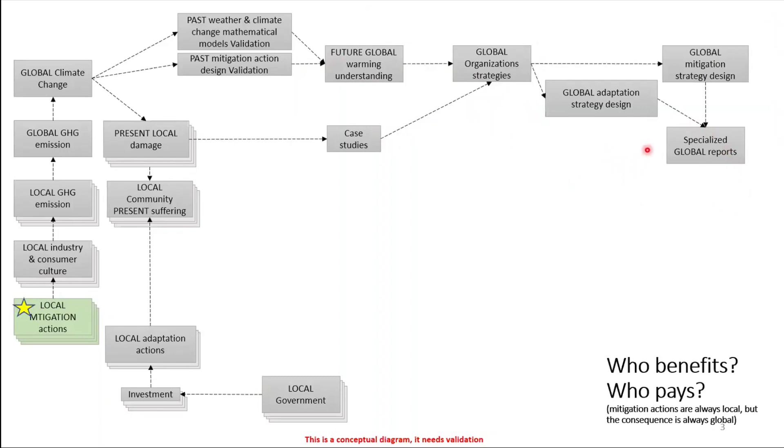And in parallel, global climate change enables the validation and verification of several mathematical models and also past mitigation actions. So this helps to understand global warming. That helps global organizations to design new strategies, and they also use new case studies from new damages produced in different parts of the world. And with all this, they generate specialized global reports combining adaptation strategies and mitigation strategies.

But we also have third-party climate change analysts and companies that generate their own technology reviews, for example. This is highlighted because we are going to talk about one of these reports about cooling, in this case, space cooling. These kinds of reports help to adapt global strategies to local strategies. And after this, local governments can understand, with some help, the recommendations for local action. They also receive some top-down pressure. And then we are closing this loop with some investment, and some local mitigation actions are done in several countries.

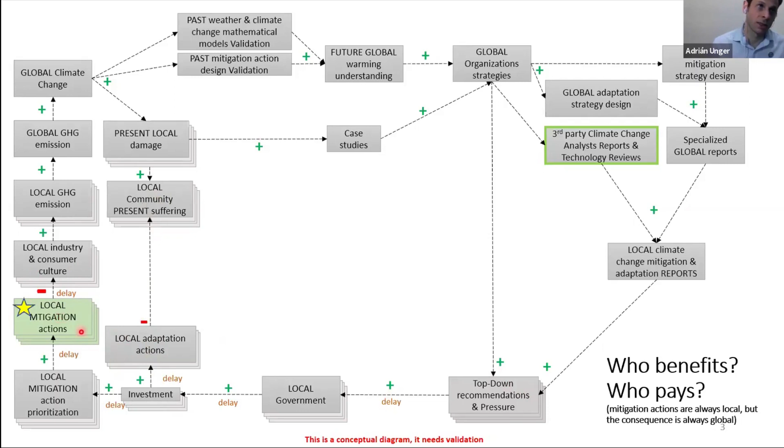After that, we can introduce delays almost everywhere, and understand the relationship between the blocks here. For example, if more local adaptation actions are taken, we will get less suffering of the people. And here we also have a negative relation, in which with more mitigation actions, less emissions. The local industry and consumer culture change for the better.

Yes, thank you. So we look at what the problem of cooling is. The presentation focuses on space cooling, but we can look at cooling in general to start with. Cooling is vital for both health and prosperity. However, the problem is that business as usual, the way we are cooling, will be a disaster for the planet. So we have this contradiction. Something that's good will also cause damage. So getting cooling right, without damaging the planet, is a problem, but it's also an opportunity. The next slide.

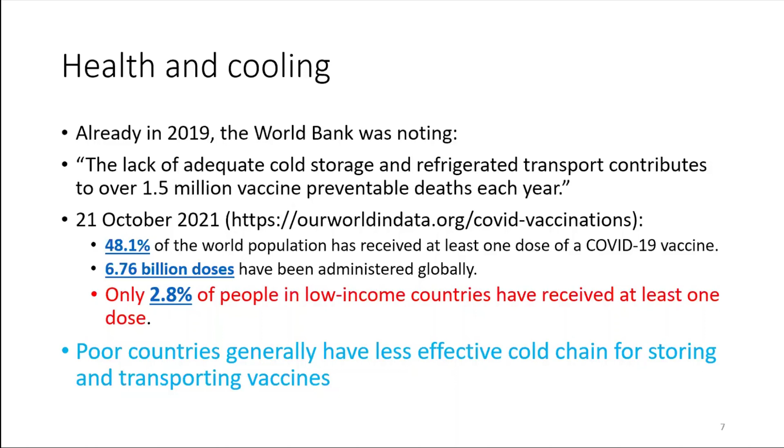And as of yesterday, about half of the world population has received at least one dose of COVID-19 vaccine, but only 2.8% of people in low-income countries have received one dose. So there's a big gap in access to vaccines, and a lot of it is related to access to cold, to have the vaccine sent to the people who need it, who might not have refrigerated locations and refrigerated transport. So cold and health is very important. Next slide.

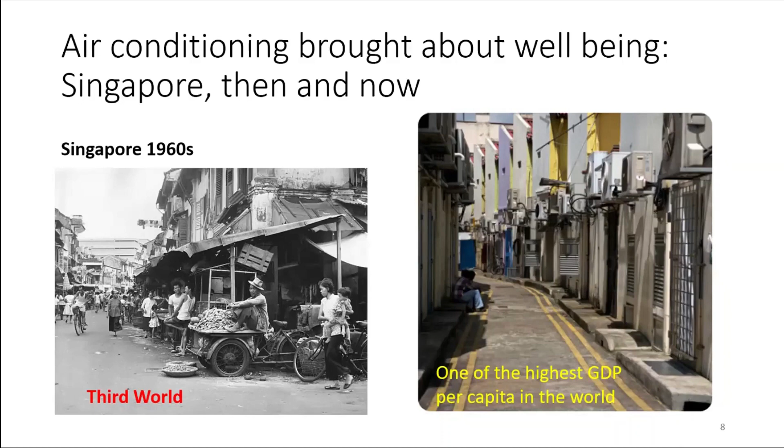In the 1960s, every poor country was hot. And I was convinced that we hot people were lazy people, so we were poor. But that is not the case, and Singapore was the first country to go from third world to first world. It's a very hot place, but it has one of the highest GDP per capita in the world, slightly higher than the US. Next slide. And air conditioning was a part of how Singapore could become a better place to live and become more productive. Obviously not the only factor.

The problem: over the last decades, the number of air conditioners has increased from about 500 million in 1990 to about 2 billion now, and is projected to increase as people in hot countries become more prosperous and demand more air conditioning, but also because the planet is getting hot. So we'll need more air conditioners. And this is part of the problem. Next slide.

Another problem is with increasing urbanization, urban areas are hotter than the surrounding areas because of a phenomenon called urban heat island. Sometimes a place may have a very good climate, but once a city is built there, it gets hot and needs cooling. Los Angeles in California is a very good example of such a place. But there are many other cities. You probably know some of them. Next one.

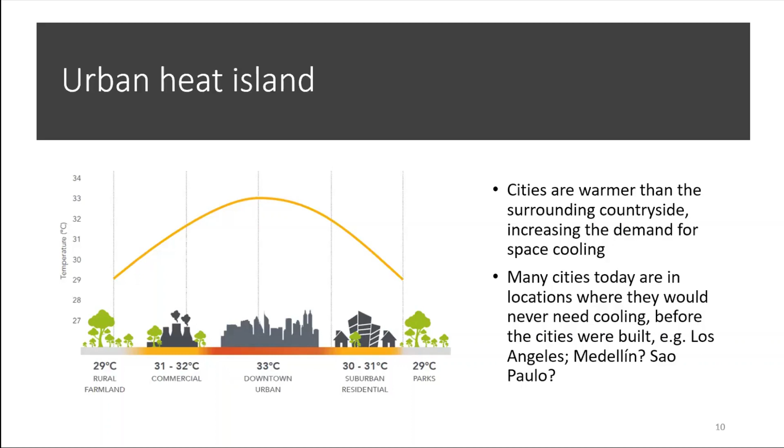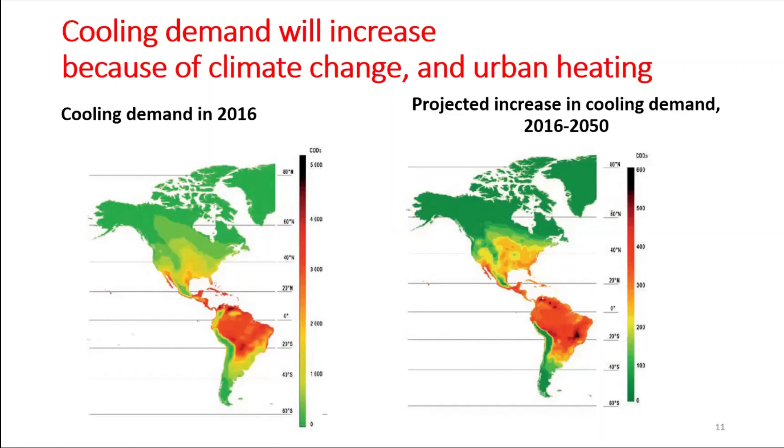This graph shows on the left-hand side the cooling demand in 2016 in cooling degree days, and the red part is the part that's hot. The right-hand graph shows the increasing cooling demand in the Western Hemisphere. The colors mean something different, but red means 400 on the right-hand side. It's basically a 15% increase in cooling degree days in the next 3-4 decades because of climate change. So the places that are green now will be yellow and red later on. Next slide.

And deaths from extreme heat events will also increase, which is to be expected, unless we can do adaptation and prevent this. Next slide.

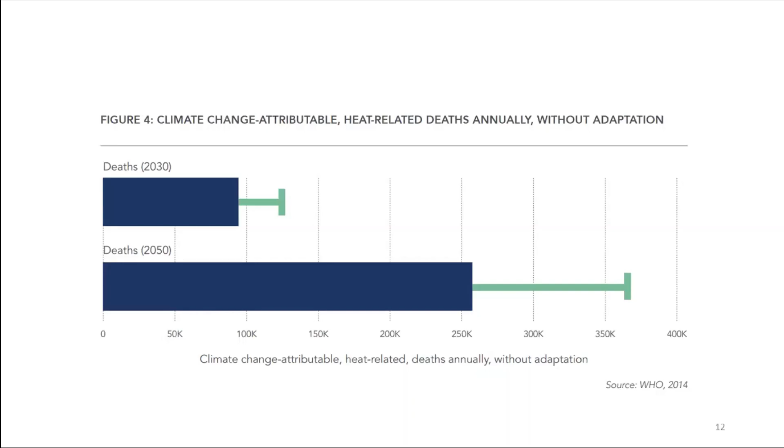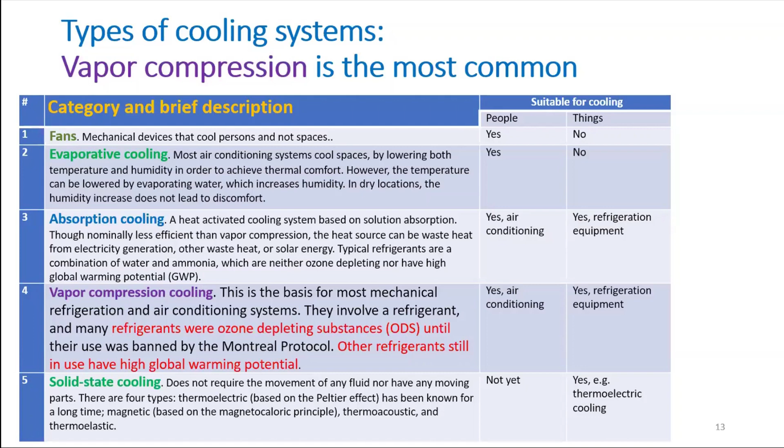Next slide. Vapor compression requires a refrigerant which is compressed and then expanded, and this generates cooling in refrigerators, air conditioners, and all sorts of other industrial and commercial cooling equipment. There has been an evolution of refrigerants. The first generation, before 1930, was anything that worked. The second generation was chlorofluorocarbons that were inert, non-toxic, and very efficient. Then they realized in the 1980s that this was damaging the ozone layer. So the third generation was substitutes for the CFCs that didn't damage the ozone layer or were less damaging. And then the fourth generation, which we'll come to in the next slide.

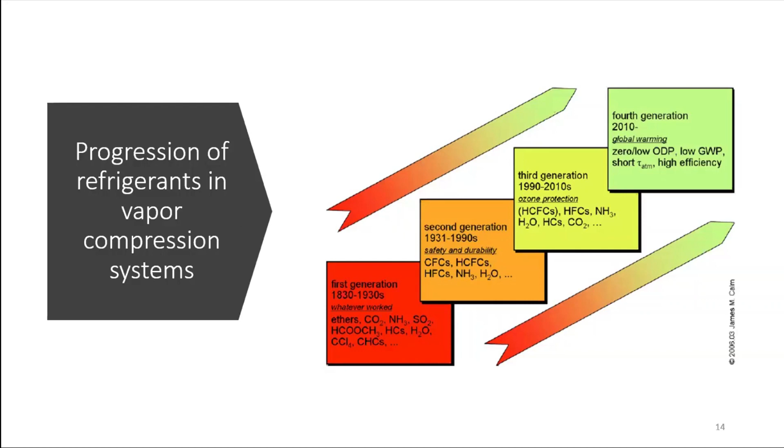Next slide, please. The early second generation was CFCs, chlorofluorocarbons, of which the main one was R12, which is defined to have an ozone depleting potential of 1, how much it damages the ozone layer. All other gases are measured compared to R12. One of the replacements for R12 was R22, a hydrochlorofluorocarbon. It doesn't have a 0 ozone depleting potential, but a much smaller one.

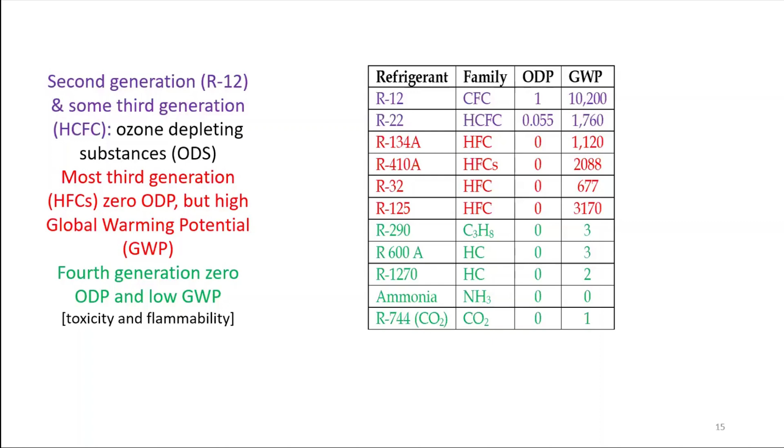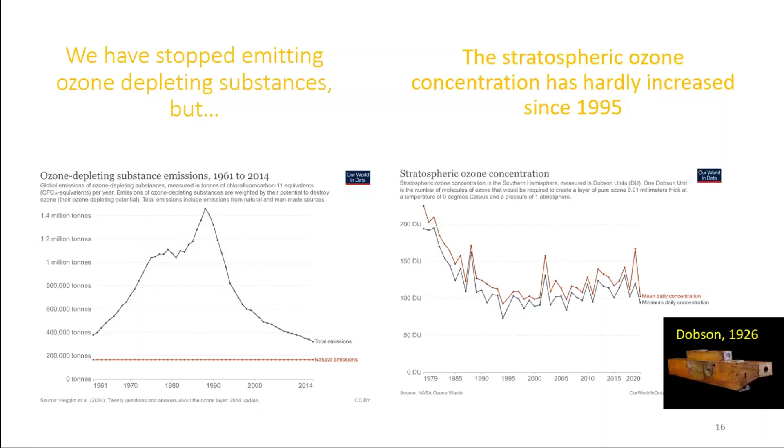Thinning is uneven, and the ultraviolet radiation is very high even in the northern part of Argentina and Paraguay, Brazil. So we still haven't resolved it. We've stopped emitting ozone depleting substances, but we still have a problem. Next slide.

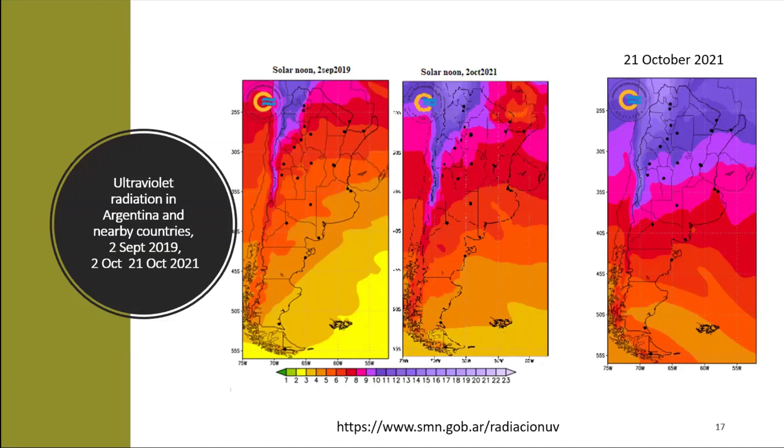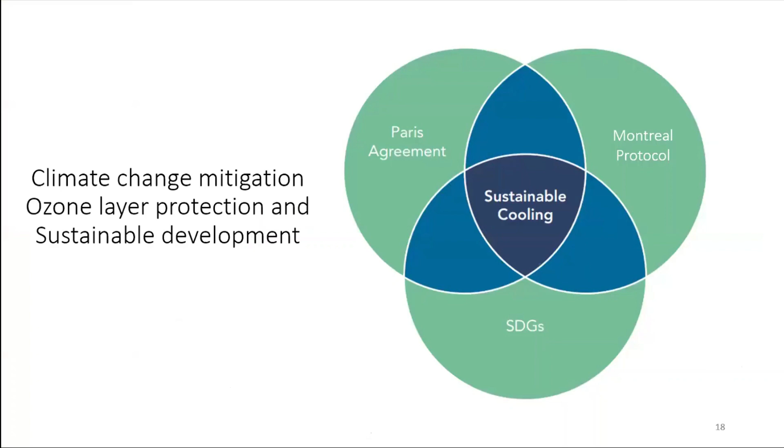So let's try to quantify the problem looking at one area of cooling, which is residential cooling, air conditioning. By 2030, half of the world population will be in hot climate. Fortunately, Latin America and the Caribbean is not very hot. I mean, you might disagree, but compared to Africa and Asia, it's less. There's more nice climate.

But anyhow, by 2050, the residential cooling demand will increase 3-fold globally and 5-fold in developing countries, which are hotter. We have 1.5 billion room air conditioners today, and this is expected to triple if we see the trend. And a technological thing is even the most efficient air conditioners today are only reaching about 14% of the theoretical maximum efficiency. So this is a part of the problem.

Part of the solution is better, and here you need a systems view. You say the problem is air conditioning, but the solution is very much broader. Better urban design, better street alignment, more vegetation, less urban heat island, and all of these can be addressed. Second item, better thermal design of buildings, so the buildings don't heat up so much and the cooling demand is decreased. Then higher efficiency in cooling, which would be the more linear thing. The air conditioner could be much more efficient.

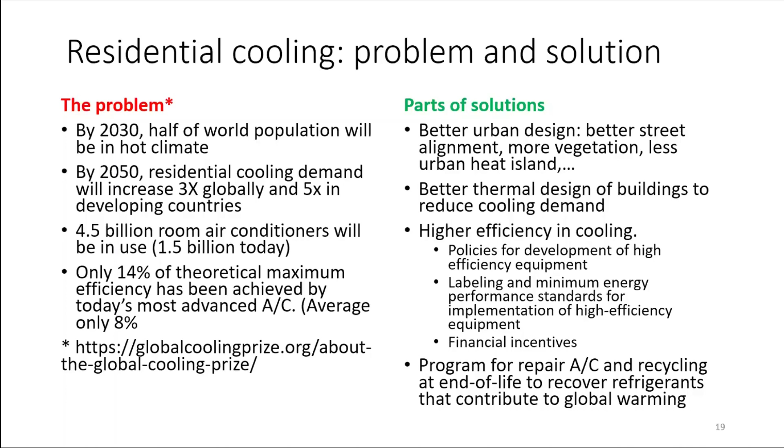And finally, at the bottom, it's important that because these air conditioners and refrigerators include refrigerants that are damaging the ozone layer and causing global warming, we should have programs to recover the refrigerants so they don't get liberated at the end of the life of the equipment. Next slide.

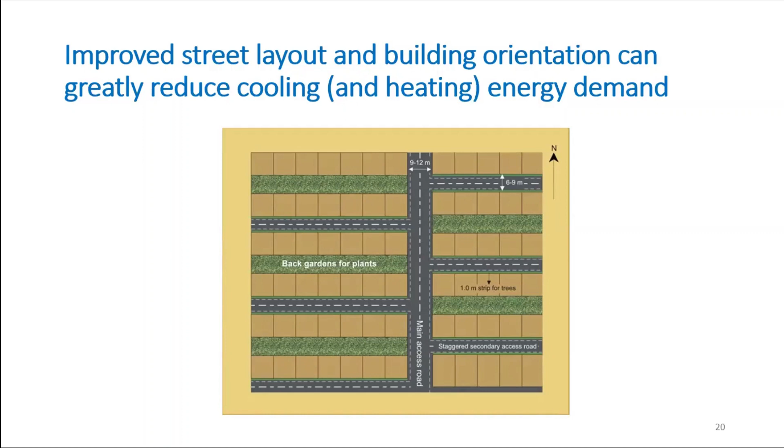This is an example of street alignment. If the streets are east-west, then the buildings can be better shaded for sun to reduce the cooling load, and they can also admit the sun in winter to reduce the heating loads. So building orientation is basically a zero-cost item that can reduce cooling and heating demand. Next slide.

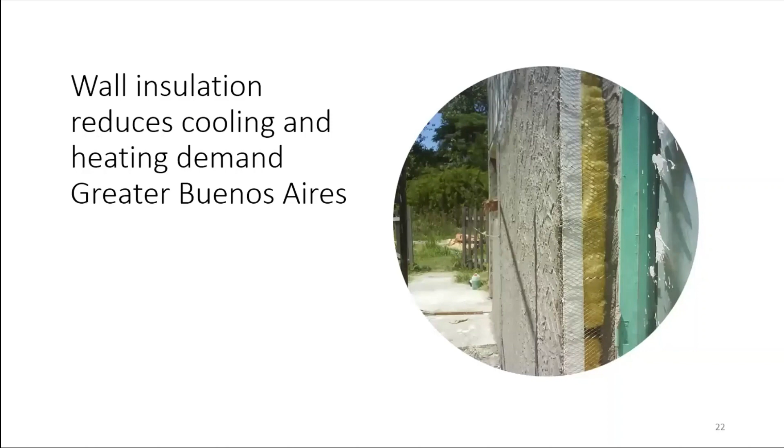My company, MGM Innova, received support from the Clean Cooling Collaborative, which is a global organization promoting clean cooling and sustainable cooling. And they sponsored a project for us in Latin America and the Caribbean. And we focused on commercial and industrial cooling. This is because we were looking at what the private sector could invest in to improve their cooling performance. We reviewed alternatives to vapor compression systems. Vapor compression is what I said was the main technology.

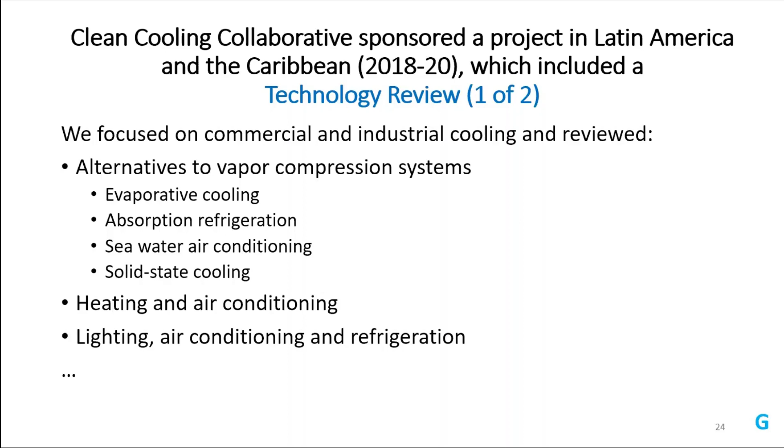Because we were looking for street-wise practical solutions, and not just theoretical things, we looked at application-specific alternatives. We looked at what you can do in specific situations. So we looked at building air conditioning, and different solutions within building air conditioning. We looked at district heating and cooling.

District heating is well known: a city like Copenhagen or Moscow or Beijing has central generation of heating and pipes running under the city, sending heat to heat the places. District cooling is much less common, but you could generate cold in a central location and then send the cold water, usually, to buildings around the central location and use it for cooling. Why would you do that? Because the heat source could be waste heat from some process. So a power plant in Medellin, in the electric company, has a district cooling system serving the central part of the city of Medellin. That's the first example in Latin America, but it has a reasonable amount of potential.

Then we looked at commercial refrigeration, and we focused on supermarkets as something that's replicable because there are chains. So if you find a technological solution, you can apply it to many, and there are different needs. You have freezers, refrigerators, bottle coolers, and space refrigeration. And some of the solutions are really out of the box. There are companies now saying, we'll eliminate the local supermarket when we deliver directly from the warehouse to the end consumer. So you eliminate the need for the supermarket freezers, because you're going from a higher level of aggregation to the end user.

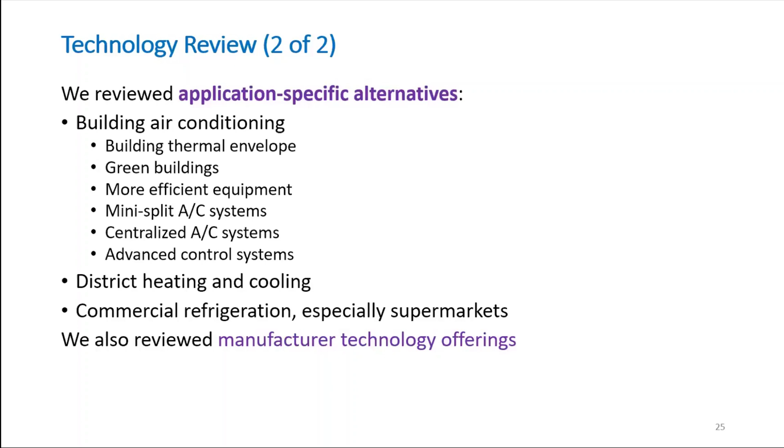These were our main conclusions. This is a very detailed report, so I'm going to highlight them. One was that recovering refrigerants from equipment at end of life is very important because there's a big opportunity for good recycling, so you don't throw the refrigerant away and damage the climate and ozone layer.

And the other important thing is that energy efficiency is more important than refrigerants. Meaning what? Refrigerants have global warming potential, but the electricity that refrigerators and air conditioners use means more carbon dioxide emissions at power plants. And this is more important because you can reduce more emissions of carbon dioxide, and that's more global warming than the refrigerant leakage. Both are important, but one is more important than the other.

So if you just go to green refrigerants and say, well, I'm going to use a very nice refrigerant, but my equipment is not efficient, you're losing. So then we found a few other things that are like things not to do, and these are important to know also. There is very little scope for ground source heat pumps in Latin American countries. I don't think we have time to get to what ground source heat pumps is now, but it's a technology that we can basically avoid and not worry about in our region.

The market for evaporative cooling is very limited. It could be explored. It only works in hot climates, but because you need water and you have a desert which could be hot and dry, but you don't have the water, it might not work so well. Absorption cooling may be an attractive alternative for building air conditioning and industrial refrigeration. Absorption cooling works by taking heat, and it can be waste heat, so that's good, and generating cold from that.

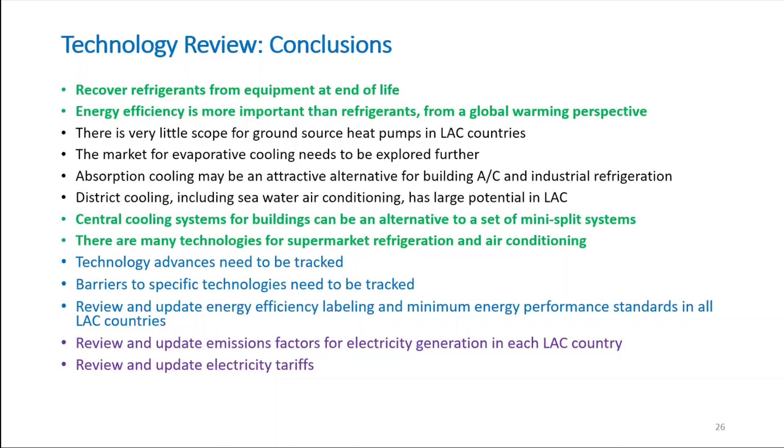Thanks, Gautam. You have one last. I have one last slide.

So, after all this information, I would like to say that we've been talking a lot with Gautam about the content of this report. So we've been analyzing the different abstractions of the know-how presented here, and we find that we have high-level abstraction, mid and low-level, kind of the generalist and specialist know-how, and this is really important because it's kind of a proxy of the know-how that you need in a company to build these huge reports.

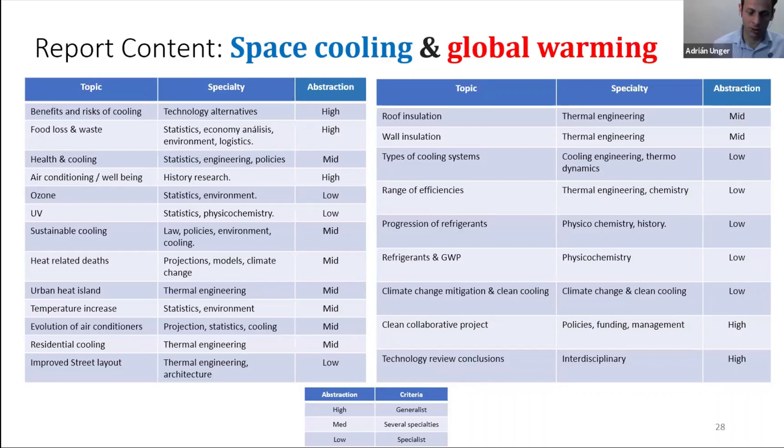Now Gautam has presented a summary, but they are really complex, with a lot of information, a lot of references. And this slide you can check in detail, but it's really impressive. And you actually need huge interdisciplinary work for making this kind of report. So you may check also the details after the presentation.

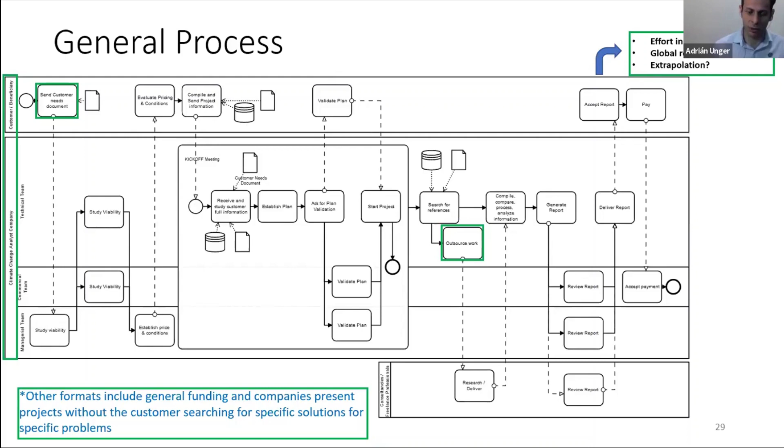And maybe we can ask about how much effort the organizations put in disseminating these reports, and if there is a centralized database of these reports. Well, and also again about the extrapolation. How can we extrapolate the case studies between cities or between case studies, so we can generate better understanding of the similarities between cities, for example, between damages.

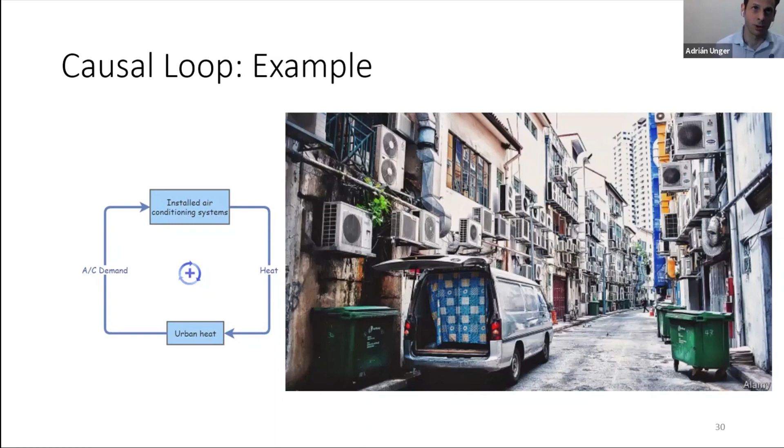So let's go back to the causal loops. So here we have a very simple one, as Gautam explained before. If you install more air conditioning systems, the heat in the streets will get higher, and the people will buy more air conditioning systems. So there we have a positive feedback loop, if we make the diagram a little bit more complex, or take more context into account, for example, the greenhouse gas production will increase the mean seasonal temperature.

And well, this kind of diagram can help to understand some insights, part of the report that Gautam, for example, explained. And well, here we can see the part of the leakages or the refrigerant stock in used air conditioner equipment. So what can we do to make this activity of recovery profitable? So well, maybe with market mechanisms, pricing the activity, the refrigerant recovery, or maybe with some regulations.

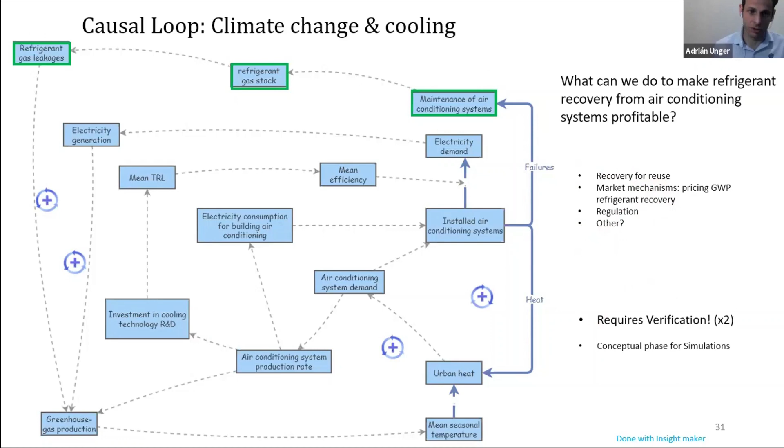And well, it's good to say that this kind of diagram needs verification with references, but they really help to understand the whole map. So again, some summary about the abstractions. Gautam talked about some actions. For example, the gas recovery. We can also talk about maybe final disposal regulations, or installing some other cooling systems, cooling techniques.

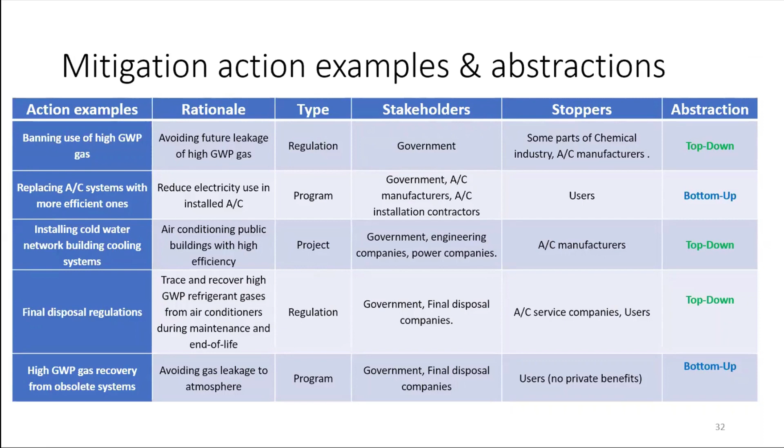And well, all these actions you can check after the presentation, but we can understand if they are top down or bottom up, depending on different characteristics. For example, if they are regulations, programs, or projects. So if we are expecting, for example, little companies to make business with the gas recovery, going house by house, recovering the gas from the obsolete air conditioning systems, well, it's a really huge effort.